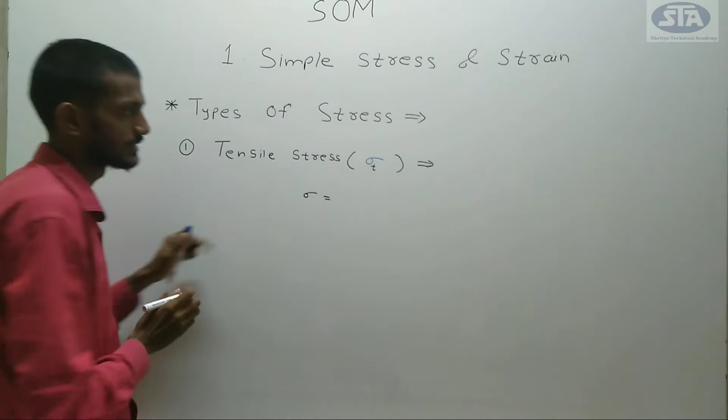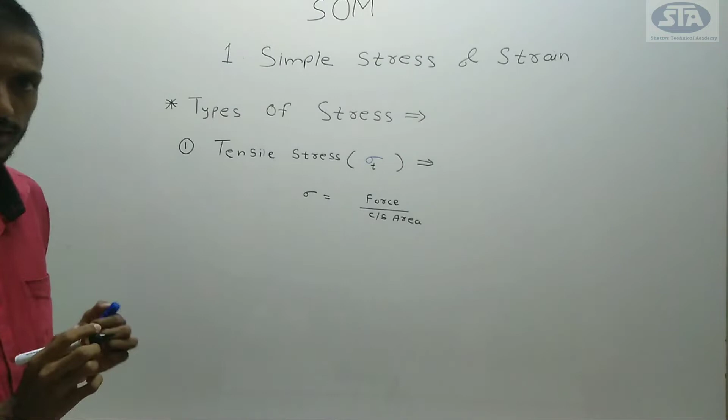Now, definition. First of all, what is the definition of stress? Stress is equal to force upon area. Stress is equal to force upon cross section area. This is the normal definition of stress, but here it's tensile stress, hence we have to apply: tensile stress is equal to tensile force upon cross section area.

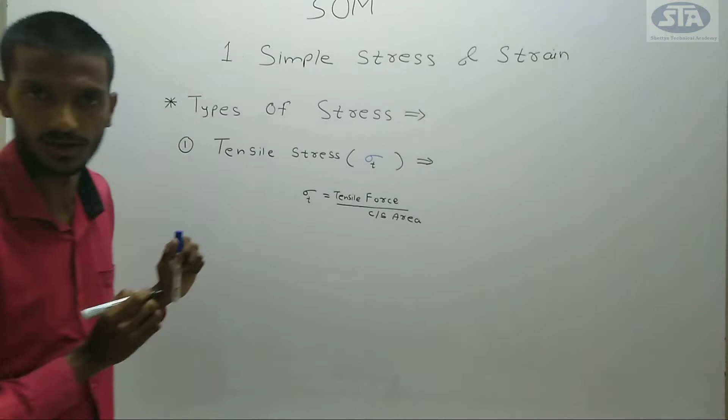Now tensile force representation will be, because of force we can denote it as F, because of tensile base of F which is denoted by T, that is called tensile force, and cross section area is denoted by A. This is the formula of tensile stress.

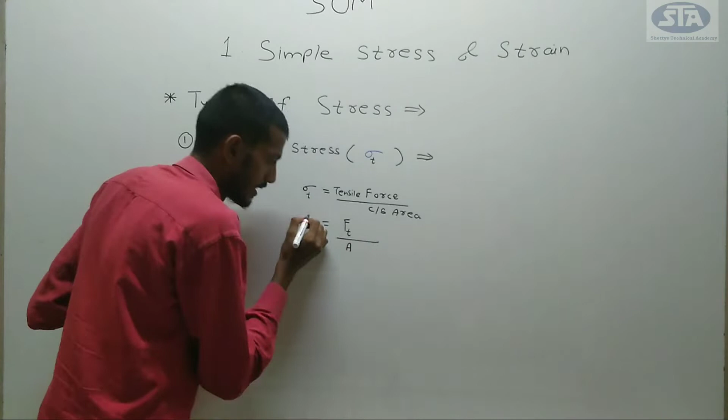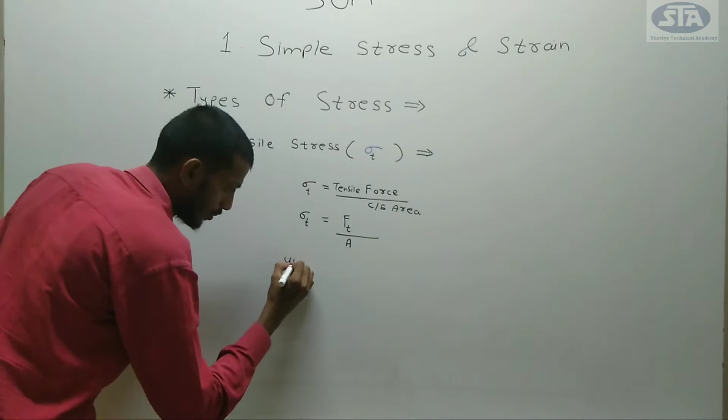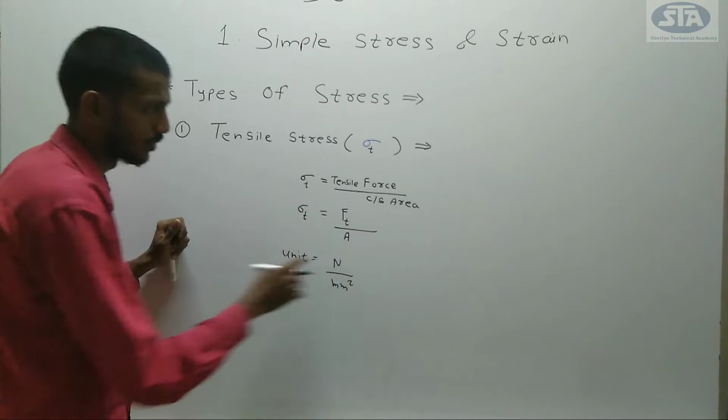Formula is same, but here the application of force is tensile force. Now unit is also same: unit of force which is Newton, unit of area which is mm square. This is the recommended unit, as we already discussed in the previous lecture.

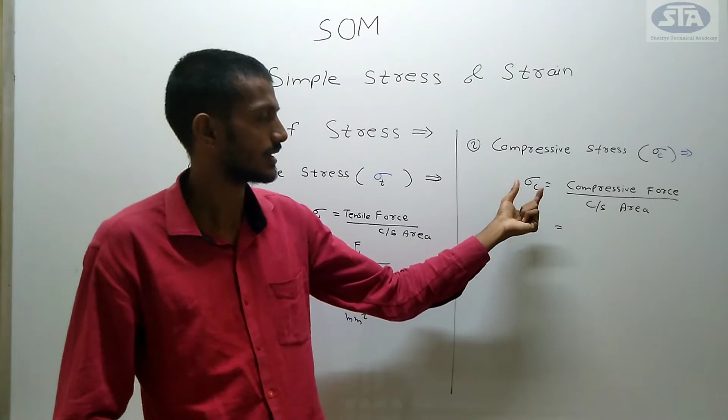Now compressive stress. The definition is compressive stress equals compressive force upon cross section area. Here only the force changes - in tensile stress it's tensile force, in compressive stress there is compressive force. Symbolic representation: F stands for force, compressive stands for C, cross section area denoted by A. This is the formula for compressive stress.

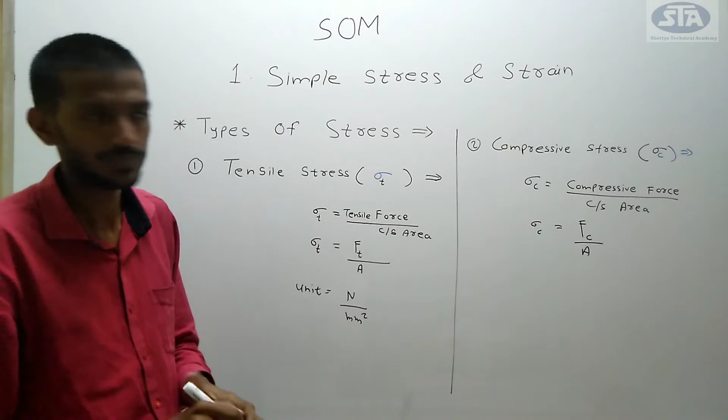Now unit is also same, which is recommended unit Newton per mm square. Newton unit for force, area unit for mm square. Next, third stress which is shear stress.

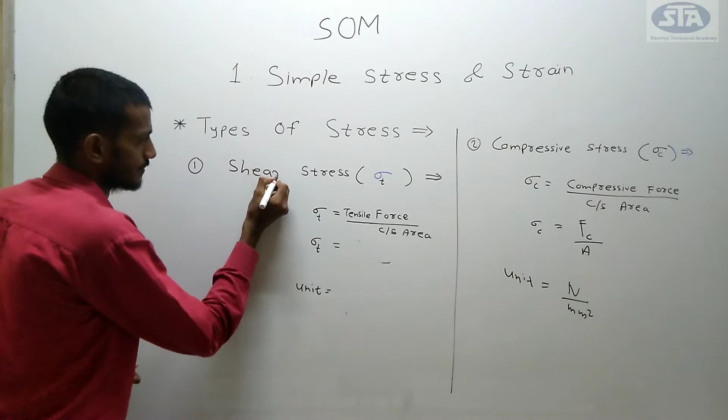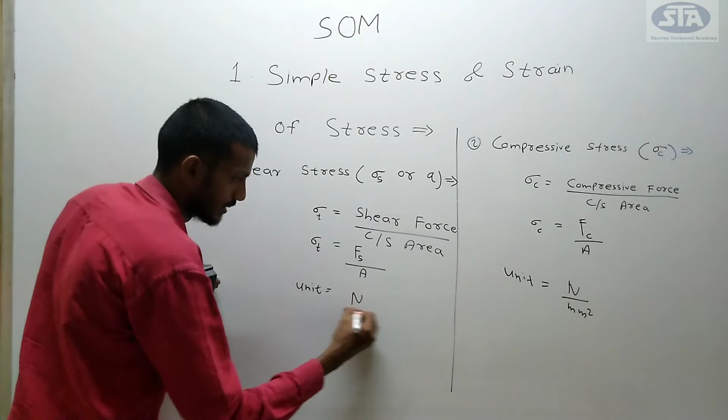Now shear stress, its symbolic representation will be sigma stand for stress, shear stand for S. Another symbolic representation is Q, small q. Now here again only force changes, that is shear force upon cross section area. Shear force is denoted by F, shear stand for S, cross section area is denoted by A.

It's again the same unit which is Newton per mm square. Now shear stress symbolic equation is sigma S, or you can also write small q. Small q is equal to F to the base S whole divided by A. This is the symbolic representation of shear stress, and this is the formula. Unit of shear stress again same, Newton per mm square. So these are the three stresses: first stress which is tensile stress, second stress compressive stress, third stress which is shear stress.

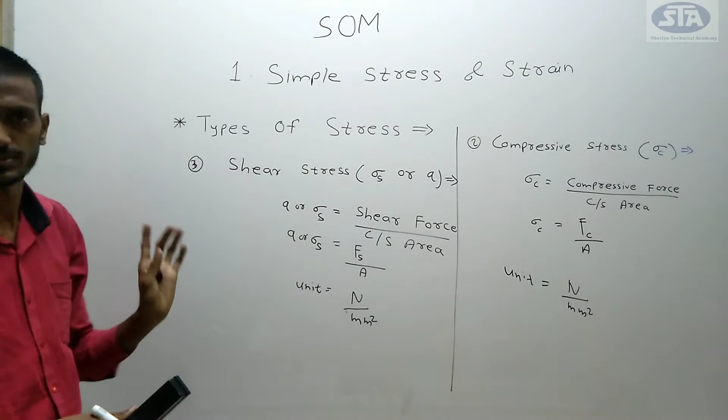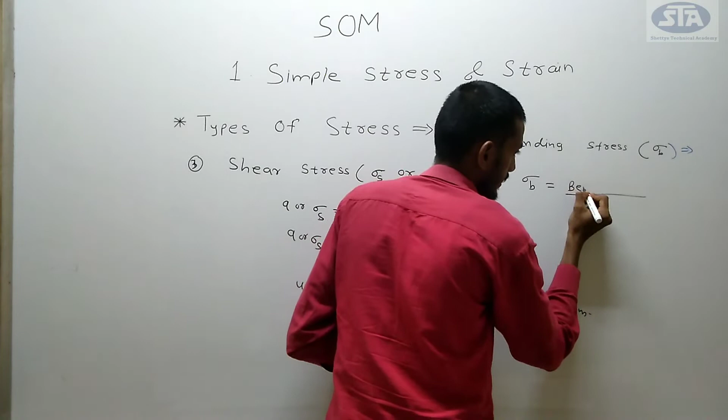Now there is also bending stress which occurs. That bending stress is denoted by sigma stand for stress, bending stand for B. So bending stress is defined as the ratio of bending force upon cross section area. Sigma B is equal to F stand for force, B stand for bending, A stand for area.

Its unit again is equal to Newton per mm square. So the conclusion is that the unit of stress is same for all types of stresses, either it is tensile stress, compressive stress, shear stress or bending stress. These are the four types of stresses.

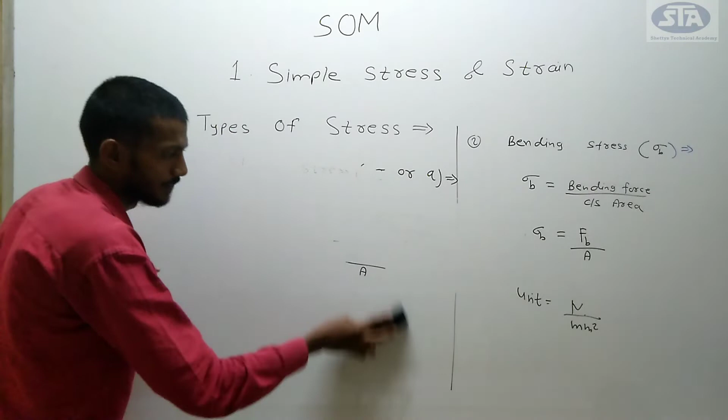Now we have to move toward strain. What is meant by strain and its types? First of all, we have to define strain. Symbolic representation of strain is small e. It is defined as the ratio

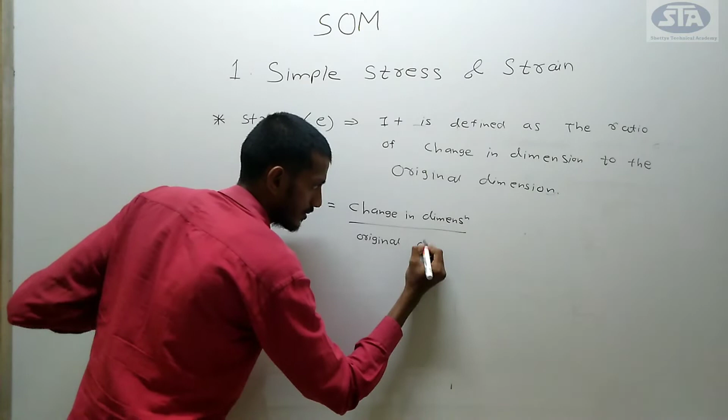of change in dimension to the original dimension. Small e is equal to ratio of change in dimension divided by original dimension. This is the formula of strain. Now it has no unit.

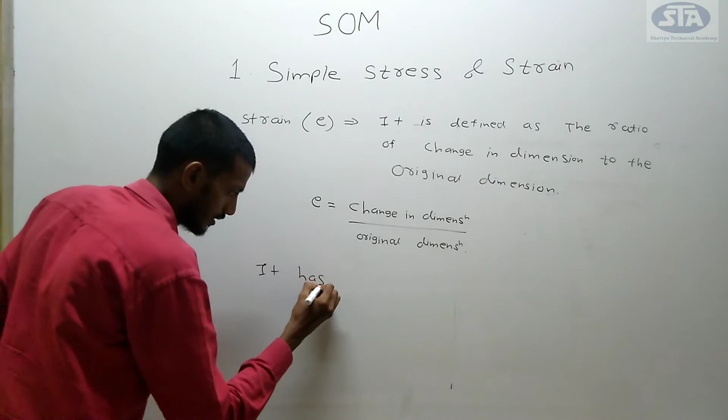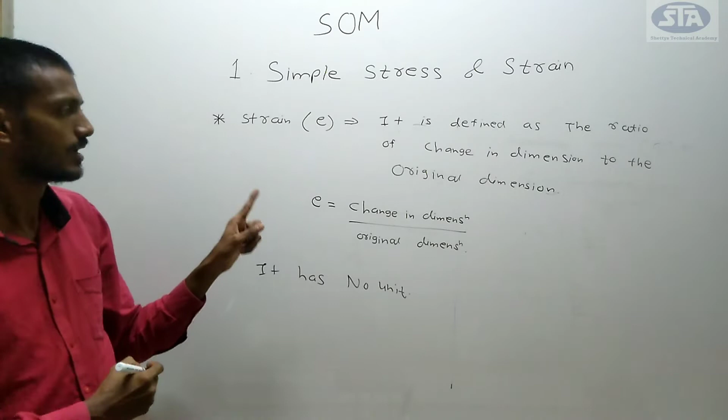Why it has no unit? We will discuss after some time. In types of strain, there are also different types. First of all, we have to define strain - strain is defined as the ratio of change in dimension divided by original dimension. Now, students, we have to discuss the types of strain.

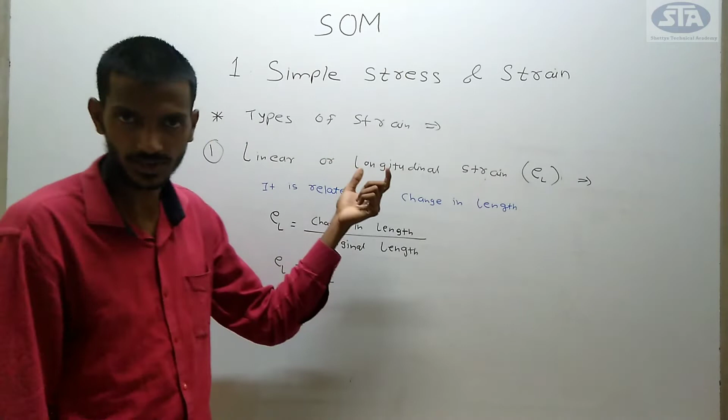Now, first type, which is linear or longitudinal strain. Its symbolic representation for strain is small e, and for linear it is L to the base, meaning L stands for linear, E stands for strain. That is linear strain. It is related to change in length.

Means if we are applying tensile force on the part, then change in length occurs. If we are applying compressive load on the part, then the length will get contracted. Hence, its formula is: linear strain is equal to ratio of change in length divided by original length. That change in length is denoted by delta L.

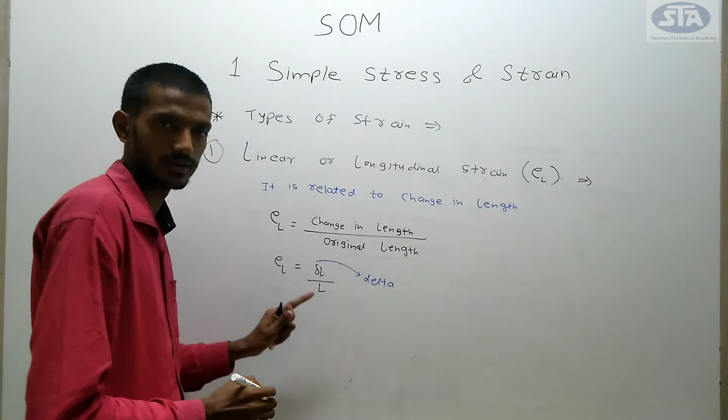DELTA, which is called delta, and suffix L, which is called length. Delta L is called change in length, and original length is represented by L. Now, in the previous lecture we already discussed strain has no unit.

Why? Let us consider original length, which is 2 meter, and change in length, which is 2.5 meter. Then what is the value of linear strain? Linear strain is equal to change in dimension, which is 2.5 meter, divided by original length, which is 2 meter. Here meter gets cancelled, hence it has no unit. Because these are the same quantity in the same ratio, hence the unit gets cancelled, hence strain has no unit.

Now, second type of strain, which is lateral strain. Its symbolic representation is small e, lateral strain stands for LA. Now it has two types: first, which is related to the rectangle, and second, which is related to the circle.

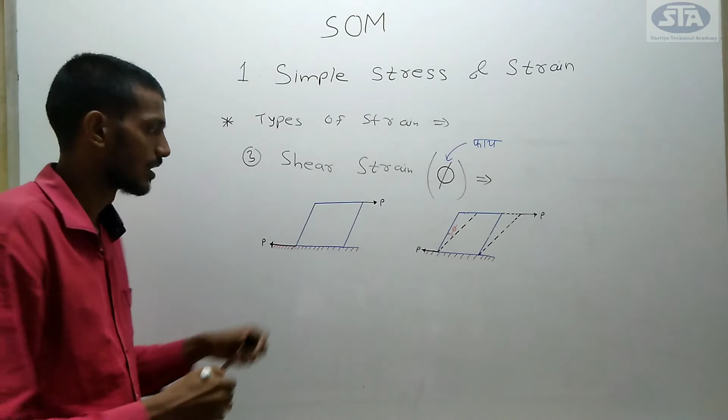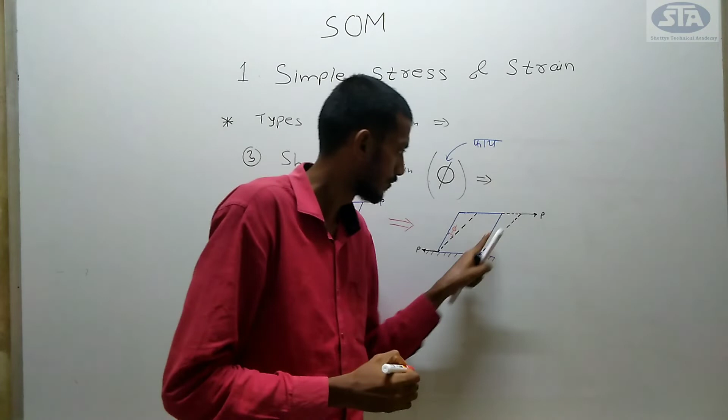Now let us consider an inclined rectangle or parallelogram. This is fixed to the bottom and side. We are applying force on the top side and bottom side in opposite directions. If we apply force on both sides, what happens? I will draw the first diagram in rigid lines, and the dotted line shows the dislocation of the parallelogram when we apply force P. From the origin point to the next point, the angle included in between is called shear strain.

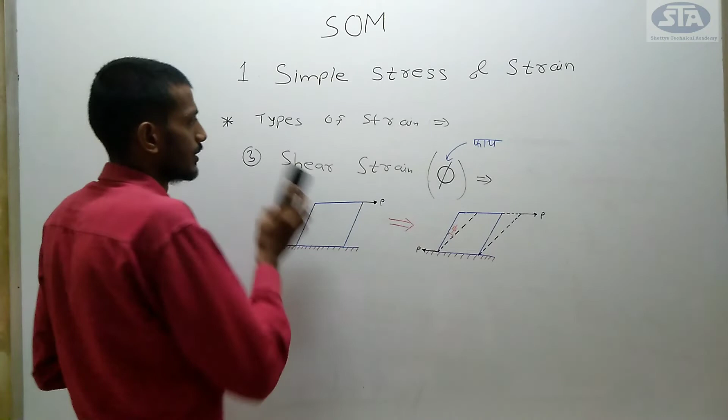Okay, now next topic, which is Hooke's law. It states that when a material is subjected within its elastic limit, the stress produced is directly proportional to the strain. Stress is denoted by sigma, and strain is denoted by small e.

When we remove the directly proportional sign, a constant is added. That constant is called the modulus of elasticity or Young's modulus.

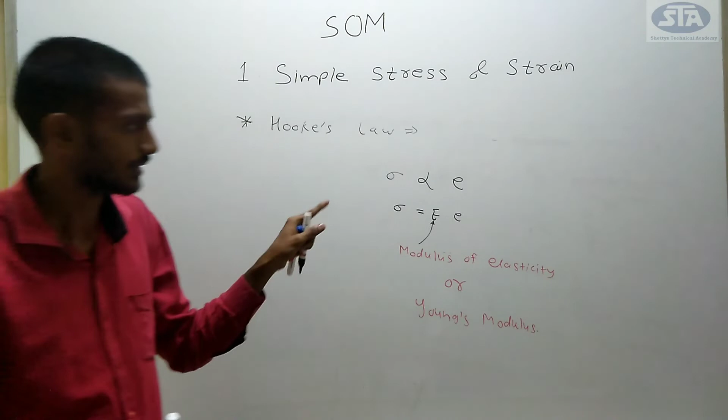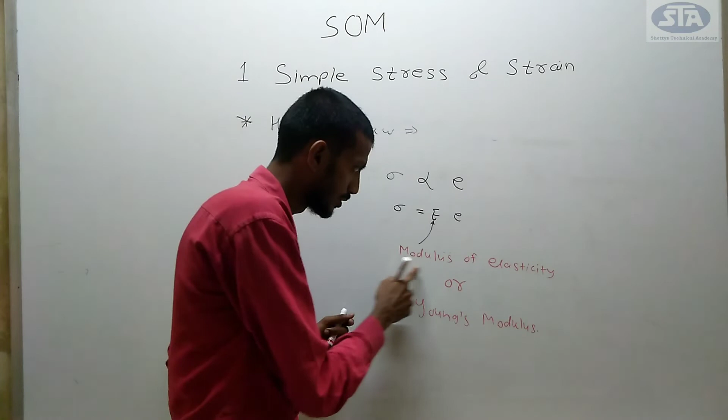Stress is directly proportional to strain when a material is subjected to elastic limit. If we remove the directly proportional sign, an equal sign comes along with some constant term. That constant term is called modulus of elasticity or Young's modulus. Now, what is the unit of this modulus of elasticity?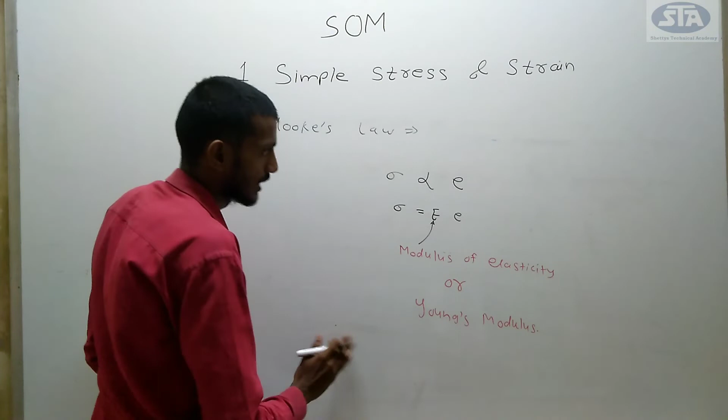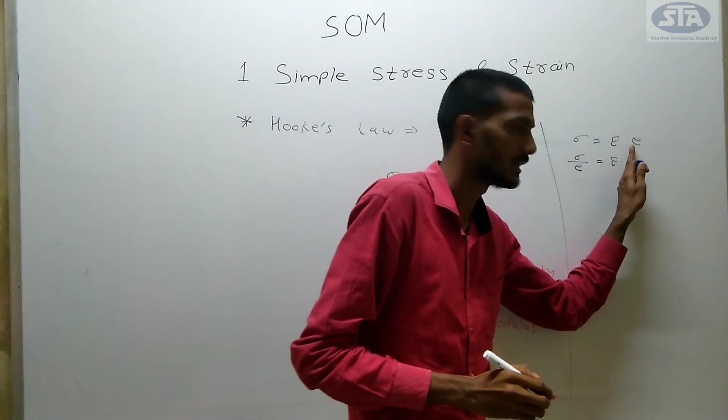From the formula we can calculate: sigma is equal to capital E into small e. So sigma upon small e is equal to capital E. Here small e is in multiplication with capital E; here it is in division.

Now what is the unit of stress? Unit of stress is Newton per mm square, the recommended unit, whole divided by unit of strain, which has no unit. Hence, whatever the unit of stress, this is equal to the unit of modulus of elasticity. So the SI unit of E is equal to Newton per mm square.

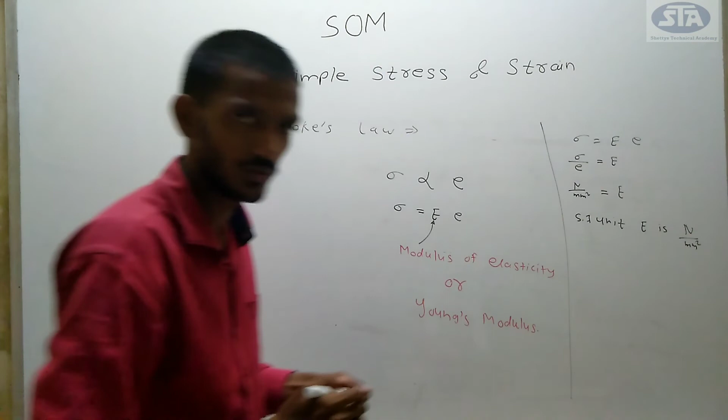Okay, sure. Now next, which is change in length of a material. If you have to find out the change in length of a material.

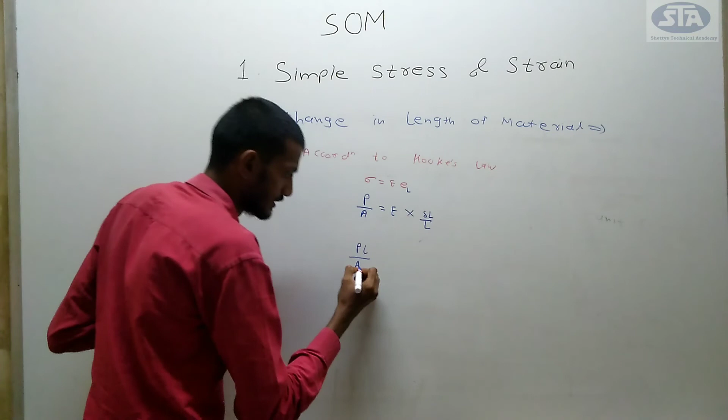This A remains as it is in the denominator. Again delta L is in the numerator. Here we keep it as it is on the right hand side, and capital E, which is in the numerator, comes in the denominator. So we get the formula of change in length, that is delta L is equal to PL upon A E.

This is the required formula you have to learn.